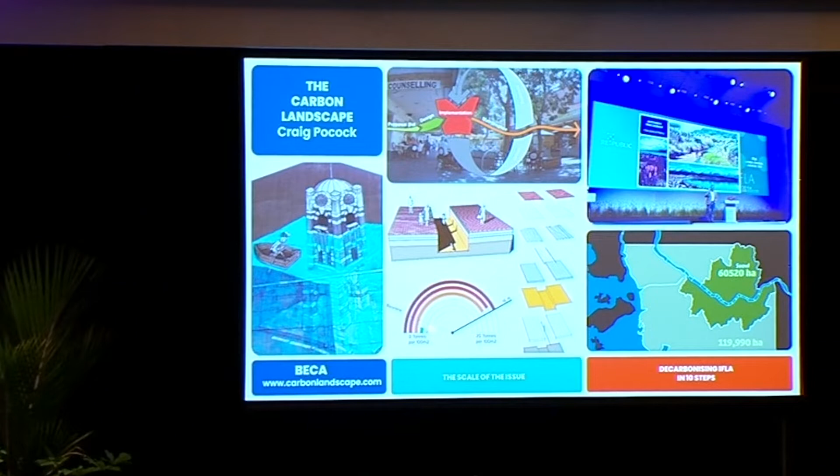All right, let's get into it. The carbon landscape really comes from a comment I made on a stage not dissimilar to this in 2006, during an award ceremony, where I mentioned there was possibly a carbon impact to what we do and we should consider it. I didn't think it was a particularly interesting statement, but by the end of the week we had a whole series of letters sent to the NZILA. The general gist was that as landscape architects there can't possibly be a carbon impact to what we do, and even if there was, all the trees, planting, wetlands and good stuff we do would surely offset it. I thought, all right, well that's a good question.

I can understand why it was such a challenging idea, because we're cool. Landscape architects are by far the coolest of all the designers. We're busy making great places, looking after our communities, acknowledging our tangata whenua, bringing them into our design processes. We are enhancing and protecting landscapes. We are the coolest kids on the block, certainly compared to architects and civil engineers. So the idea that someone flies back into the country and says, well actually that's cool, and I fully agree, and it doesn't nullify any of those cool things we do, but there's actually a carbon layer in there that we should really think about and consider. Maybe we should consider it.

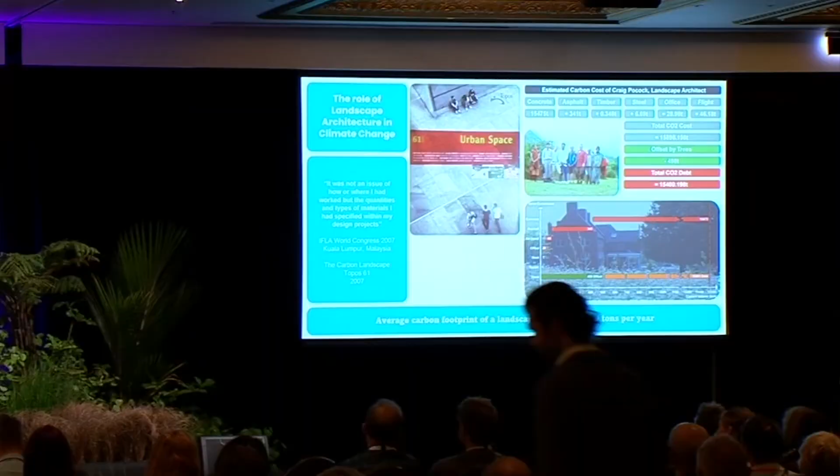I've learned over the years that if you're going to tackle a difficult situation, you normally use yourself as the example. So I sat down with a Lincoln student and spent about a week going through all my projects, doing a very rough carbon calculation of what my carbon footprint might be. We wrote that down—that was pretty straightforward, I'm old enough to have a whole lot of old paper plans, so we measured stuff up. Then we took off the sequestering value, the carbon-consuming value of all those trees, and ended up with a number.

Now, honestly, when we first started, I thought it would be maybe a little bit, maybe neutral. But it turned out that I had a carbon footprint of 1,100 tonnes of carbon for every year of my career. So I'm looking at you guys thinking every one of you is probably not dissimilar. And as I often say, I had a pretty average career, so I hadn't done anything particularly large or big urban stuff. So I thought that was really interesting. It was unexpected for me.

I didn't realise it was actually that big of an issue, so I went to Kuala Lumpur. We got a bit of money together, shot off to Kuala Lumpur, and presented a little session paper at the IFLA World Congress. So I presented the paper, dead silence. The most uncomfortable 20 minutes of my professional career. The only person that asked a question in the audience was Neil Challenger, which if you know Neil, that makes sense. Then that was it, and I remember getting off the stage feeling pretty disappointed. I felt that I'd flown halfway around the world with an idea that was not valid.

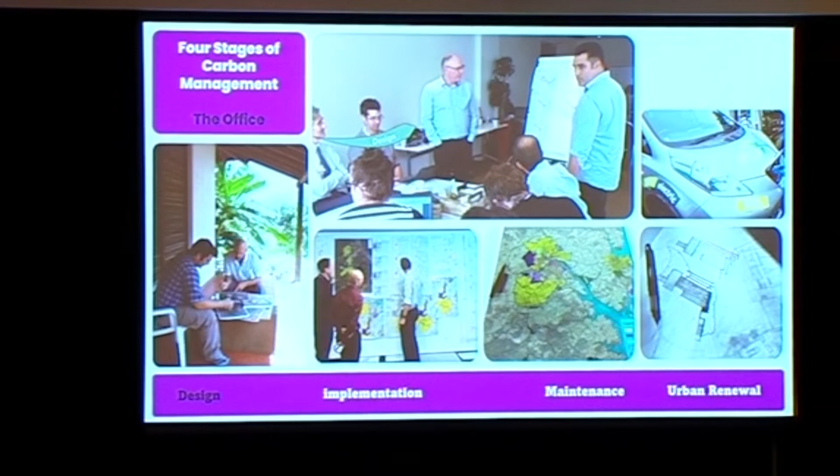So then let's talk about where carbon sits. There's no point being the dude that says, oh, you've got a problem, but doesn't offer solutions. So what I did is I broke down where carbon sits in 4 stages in what we do. I looked at the carbon impact of how we run an office. It's irrelevant. Right, great, change the light bulbs, get an EV, fine. But that's not where it sits.

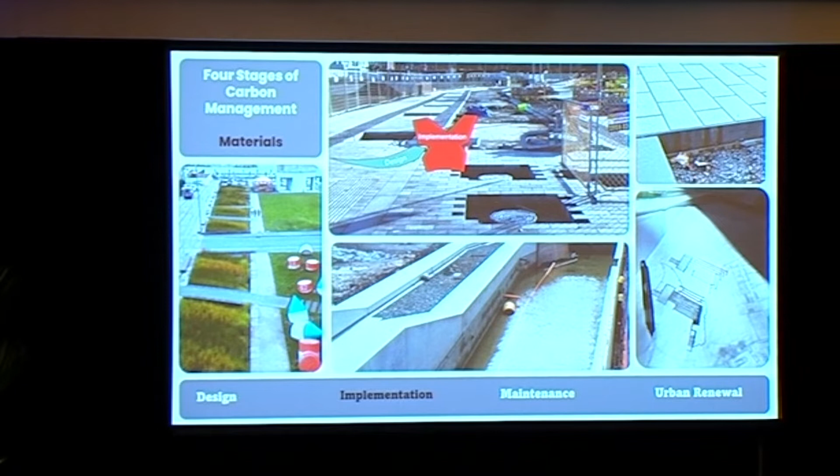Where it sits is how we build and how we specify materials, okay? That's the biggest chunk of carbon that we're responsible for, but not the only one. And I'll go through that bit in detail in a minute.

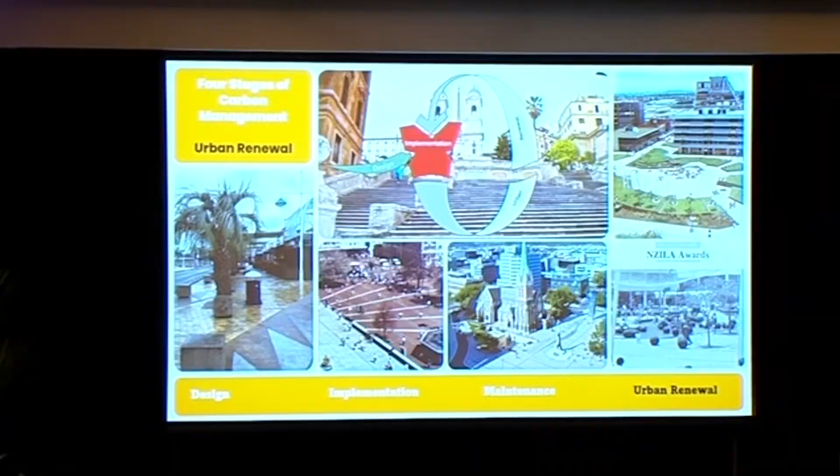If you understand that there's a significant amount of carbon in the urban spaces that we build, and that you can't design carbon neutral or zero that out, and there is a cost to it, then the absolute worst outcome for the climate and for the next generation is urban renewal, where we replace our urban spaces every 20, 30 years. Even our award-winning spaces, we've replaced in less than 2 decades in some cases. So that's the absolute worst outcome, because fundamentally, by the time we start to replace that space again, we haven't paid off the carbon debt from the first time we built it, and now you're adding more carbon into it. So what you get is compounding carbon debt or interest, and it's the absolute worst outcome.

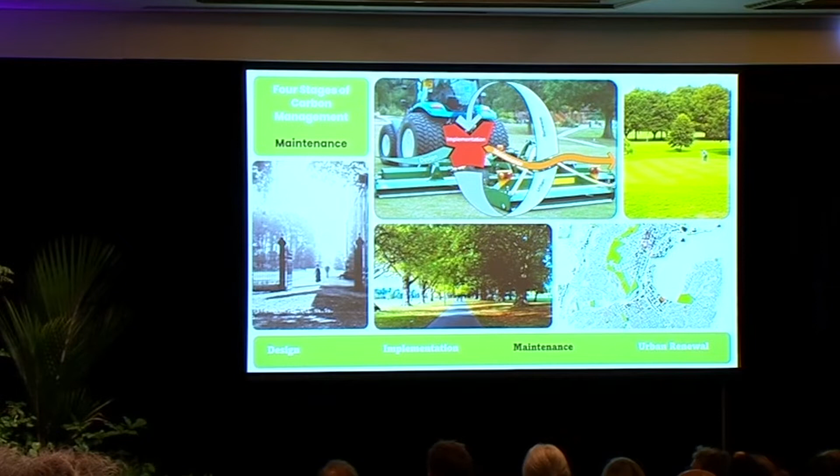Finally, the 4th area that we started looking at where the carbon sits is how we maintain our landscape, and I think this is really fascinating. This is something I've really only started looking at in the last 3 years. We manage all our landscapes with fossil fuels, one way or another. And I'm not just talking about how we mow lawns. Pretty much every aspect of how we manage entire landscape systems and networks across systems is all fossil fuel built. And the per square metre cost of it is nowhere near as big as the implementation cost of building landscape. But it is the carbon debt that just keeps giving and giving the whole life expectancy of that project. So if you can dial that down, it has a profound effect across decades.

The other thing that's really interesting about it is we have one of the highest carbon consuming maintenance or management techniques that we could have ever adopted. And what's interesting is it's a throwback from the 18th century. I started looking at why do we do things the way we do, and actually it's a throwback from colonisation and adopting a Western landscape standard, which was a show of power. So when the original colonials came through and they wanted to replicate what they left at home and to show that they had succeeded, they brought with them, unbeknownst to them I'm sure, a high carbon costing landscape.

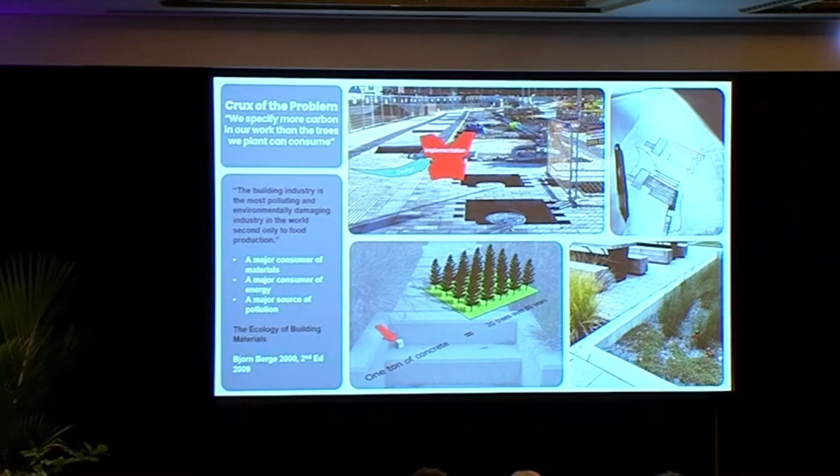So what I want to focus on with you is to talk to you about the scale of the issue. And so what we're going to focus on here is really around building and materials and how that works.

Fundamentally, the construction industry is the second most polluting industry in the whole world, secondary only to agriculture. And why that's relevant to us is that we're the ones with the pen that draws carbon on paper. Every sketch, whether on tracing paper or in AutoCAD, has a carbon value to every decision you make. So how do we understand that?

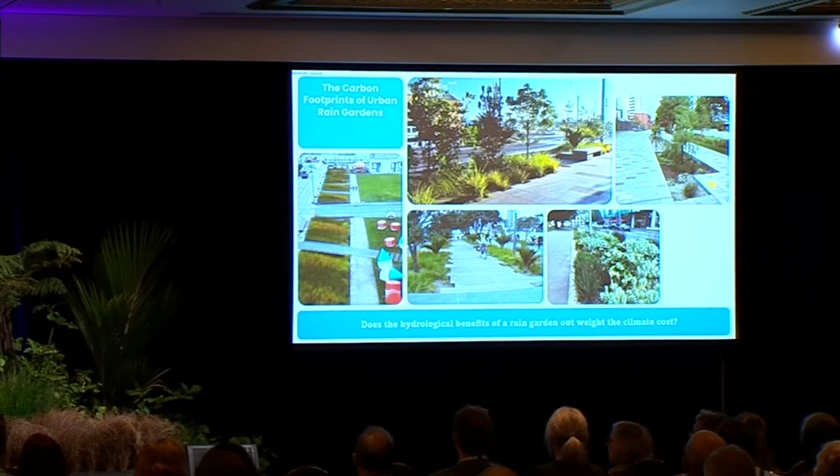About 2 years ago, I started picking up different subjects to look into, and I became interested in green infrastructure. I wanted to understand the carbon footprint of rain gardens, so we started doing a bit of work around calculating that out.

The difficulty with rain gardens is that when you look at them, they're cool, they're green. You can see community values, ecological values, and aesthetics. They're a beautiful piece of infrastructure that does a lot of work. But to understand their carbon impact, you've got to look below the ground. If you're going to understand carbon at all, you can't start and stop at the top surface.

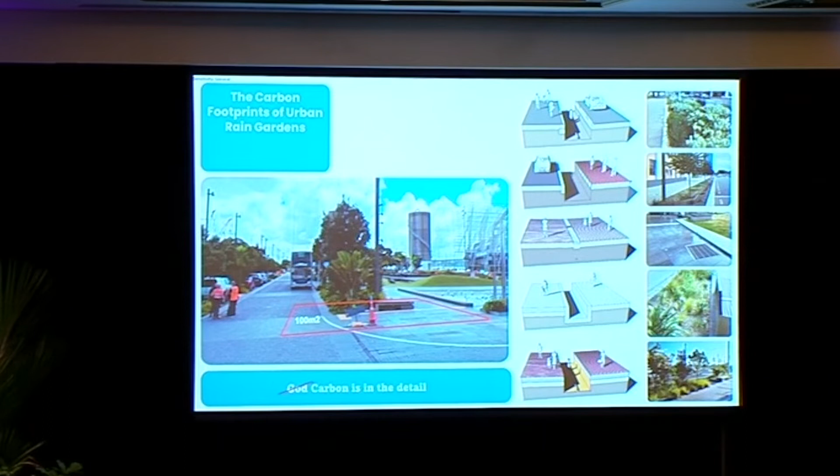The way we went about it: we found 6 rain gardens throughout all of New Zealand, and we decided to pick a 100 square metre area, a 10 by 10 area, not too different from the size of this stage. We wanted to work out the carbon footprint of 100 square metres so we could extrapolate it out.

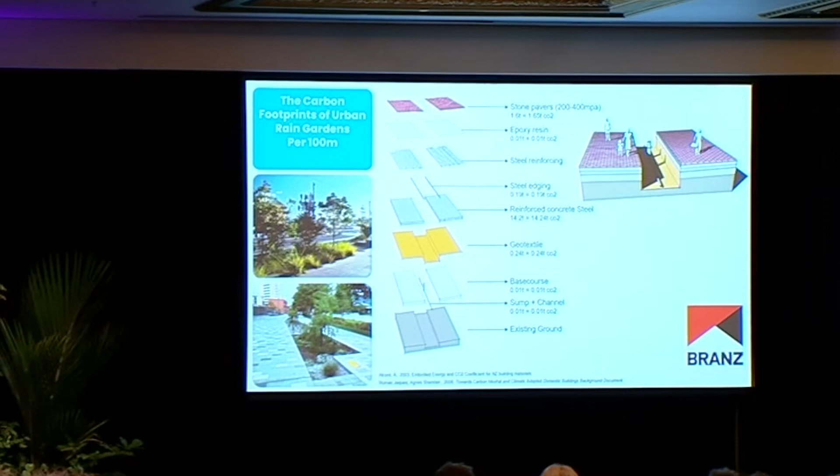The way you do it is we created a model of that 100 square metres. We then exploded each layer out, and added a carbon number to each one. These numbers are LCA, life cycle assessment numbers, provided by BRANZ that are New Zealand verified and equated out in an international standard. None of this is mine — this is just me applying it to one thing, but these are all verifiable numbers. So that's how we went about doing it.

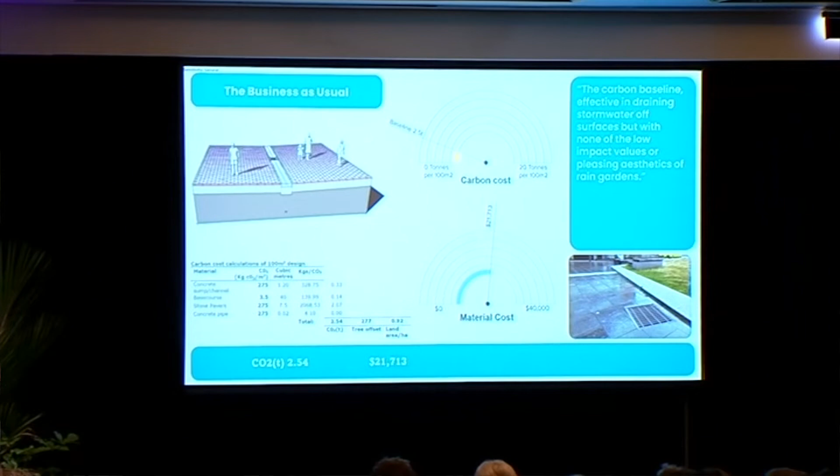So now, to demonstrate the sense of scale of carbon mitigation, we had to start somewhere, so we started with a baseline. Since I'm almost 3 decades into this career, this is how we used to build things in the 90s: good old AP40, some unit pavers, concrete channel, a slab — way before any rain garden ideas. We did this as a baseline, with all the components calculated out. So 100 square metres of business as usual comes to 2.5 tonnes of carbon.

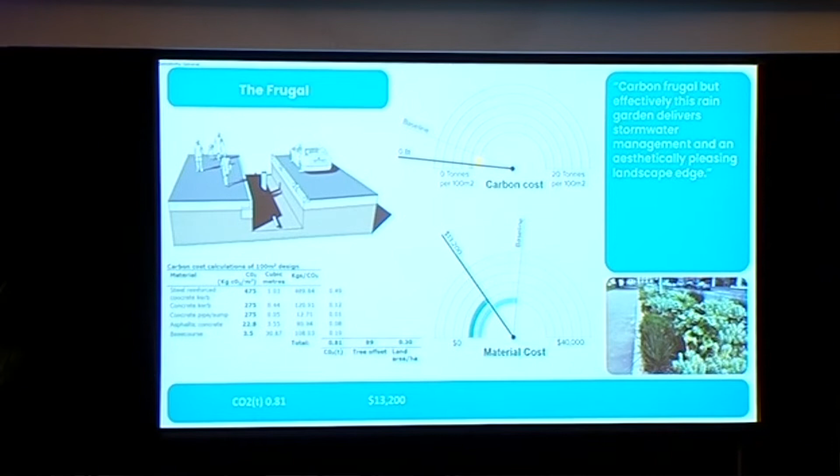This rain garden is in Christchurch. It's got really good functional asphalt surface on either side, nice concrete edging, and really nice planting that helps offset the cheaper materials. It came in at a carbon cost of 0.8 — significantly below the baseline — which means you can build green infrastructure for less than the 1990s approach to civil engineering, which is good. Hold on to that idea.

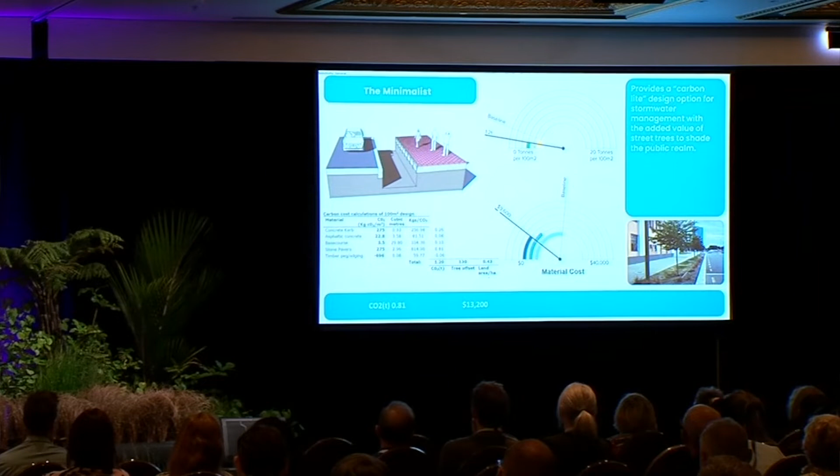The next step up, I like to call the minimalist. We've moved away from the frugal to the minimalist, meaning we put a bit more money into the paving. It's got a timber edge — again, this one's in Christchurch. It had a baseline of 1.2 tonnes per 100 square metres.

There's another 3 that I've skipped over here, so I'm going straight to the last one: what I like to call the carbon deluxe. The carbon deluxe is like a good burger — made up of 80mm cut stone epoxy resin onto about half a metre of concrete reinforced with steel. It has steel edging with an entire secondary drainage system built into the garden, lined with a nice geotextile and a bunch of material — looking at 16.4 tonnes of carbon per 100 square metres.

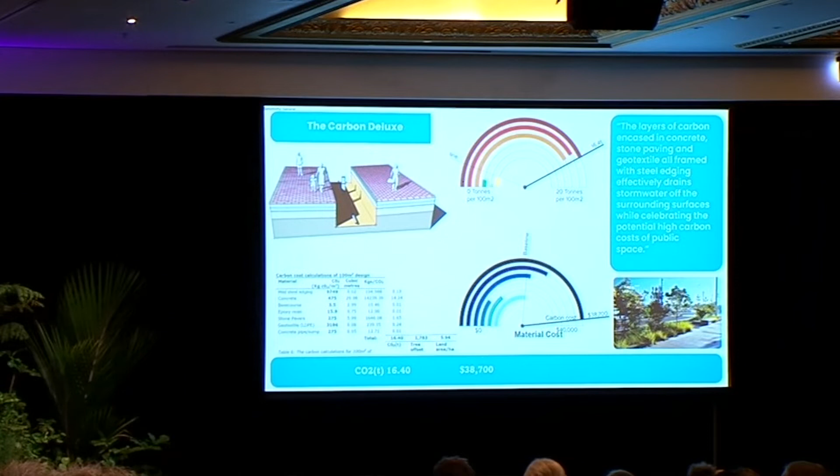I was presenting this at a water conference because I like picking fights, so I didn't worry about you guys — I went straight to the civil engineers. The thing with engineers is they get the numbers, but they can't necessarily see the outcomes. So I thought I'd demonstrate it in a different way for them: we grabbed an area that most people would recognize, and we drew that little red square.

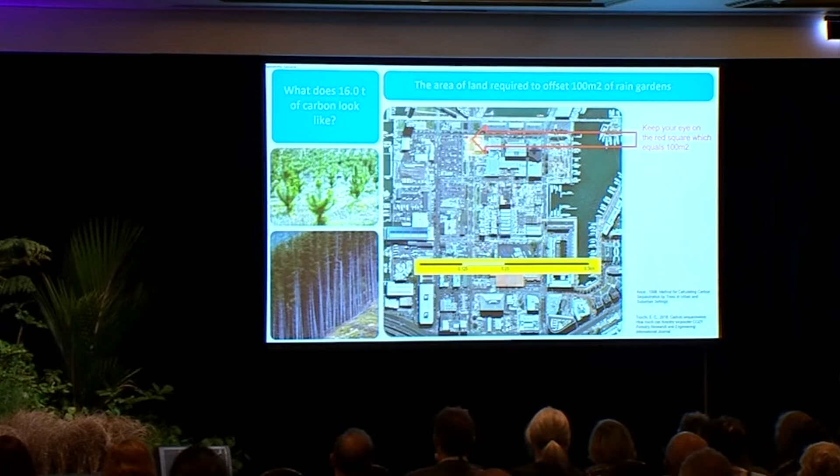This is drawn to scale. The little red square is 100 square metres to scale at the Wynyard Quarter. The yellow square represents the planting offset that you would have to plant to offset the red square.

Now, thinking back to that old comment about whatever we plant offsets what we do, right? To make this work, we use forestry standard density planting, 300 trees a hectare, the same way you'd do a pine plantation. Think about your parks and your 5 trees. We didn't do that. We did a very high density planting.

So what does it look like? Here's the frugal option: cheap, happy and highly effective, 89 trees to offset 100 square metres.

You've got the minimalist, looking at 130 trees and about half a hectare of land to offset 100 square metres. Then you get the business as usual.

Now we're saying to jump up a little bit, right? So 277 trees and almost a hectare of land to offset 100 square metres.

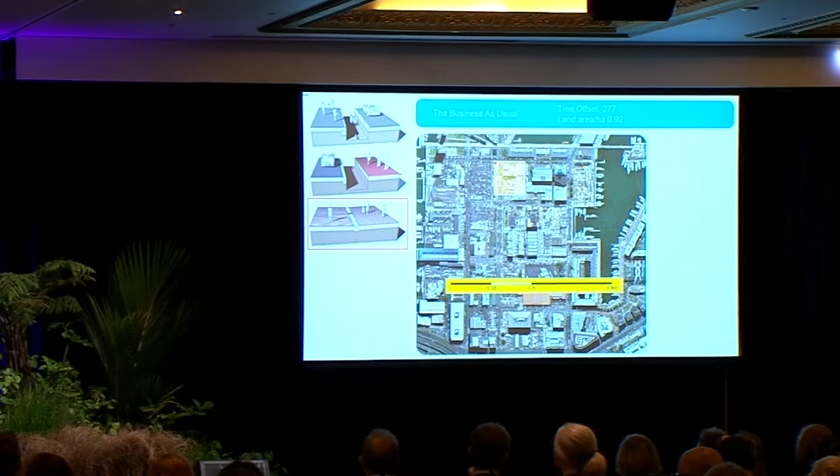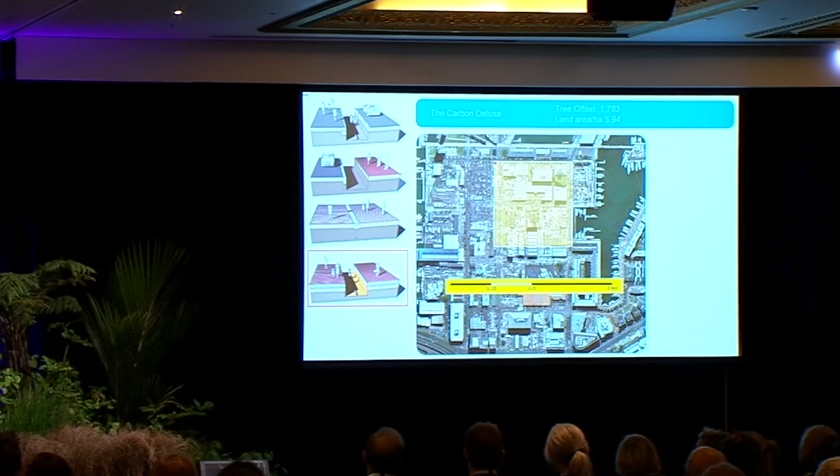Then the carbon deluxe: 1,783 trees and almost 6 hectares of land to offset 100 square metres.

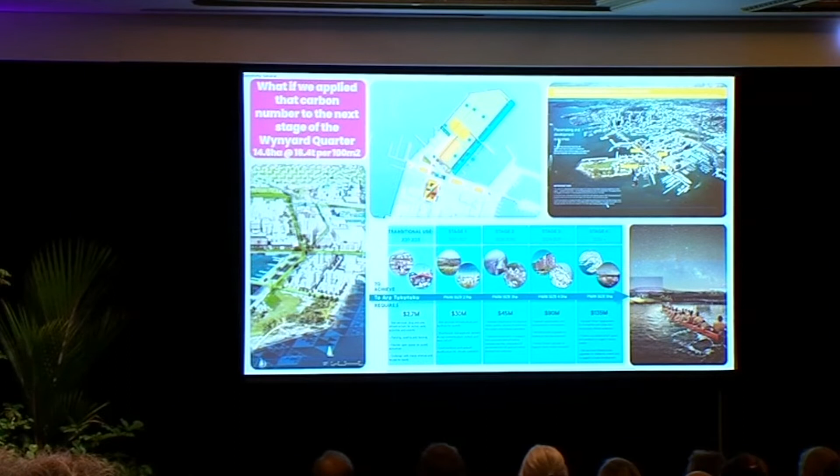So I thought about that and looked at the second stage of the Wynyard Quarter, and it looks like this incredible project, which it is - an incredible team and an amazing process that we've just seen rolled out over the last 3 years.

I know that they wouldn't do what they did - those numbers from the Wynyard Quarter are 10, 12 years old, so I'm assuming there wouldn't be that approach to detailing again. But if we applied that 16.4 tonnes per 100 square metres to stage 2, what does that look like?

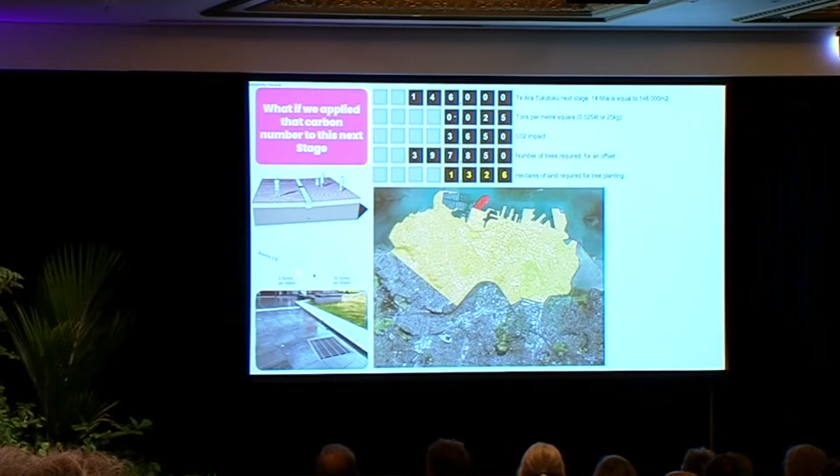Well, depending on which detail you take - hang on, we haven't got to the punchline yet - if you do the business as usual, which is the 1960s approach, which again you guys would never do, you're looking at about...

400,000 trees, which is about the size of downtown Auckland if you were to plant it out. If you take the details from stage 1 Wynyard and apply it, you're looking at about 2.6 million trees to offset stage 2. And the point is that you're not going to offset.

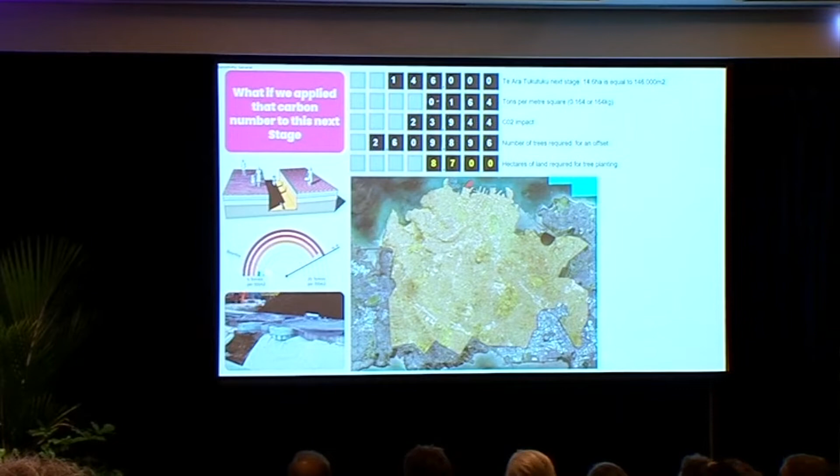You can't offset. The challenge is to reduce as much as you can, not offset. You can't do it, it's impossible. It frustrates me when people talk about offsetting. It's not possible. You need about 8,700 hectares of land.

And this is not about the Wynyard Quarter. The truth is somewhere in between. You'll use a range of details, you'll do it in the most carbon sensitive way possible to get the best outcome. So neither of those two will be the reality of the final outcome.

I think what's really exciting about the Wynyard Quarter is it's $350 million. If that value of funding is directed towards low carbon approaches, you could create a whole market of low carbon products that currently aren't supported by a whole lot of very small projects.

You'll hear me talk about it soon - one of the most powerful things we have for change is our free market value. And that's a hell of a lot of free market value that you could apply to move us forward as a collective, a decade ahead of anyone else.

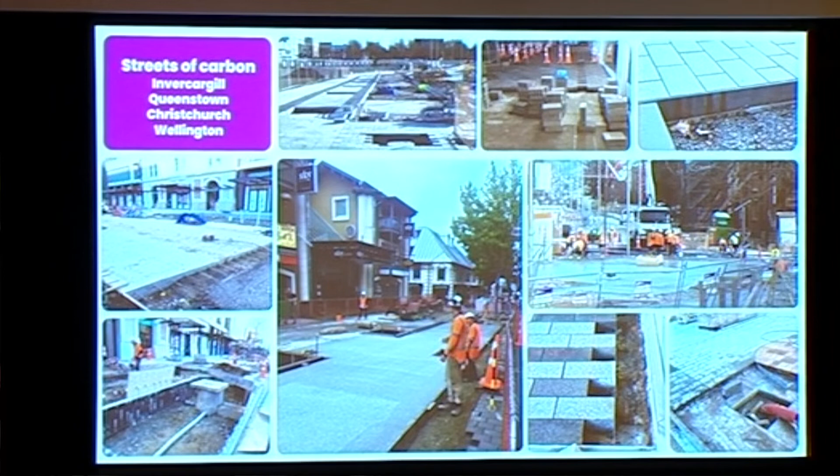It's not about the Wynyard Quarter. I see the same design details - slabs of concrete, reinforced steel edges, duplication of stormwater systems - being rolled out right across the country. This is not about the Wynyard Quarter or that team. I'm just trying to show you the scale of the issue.

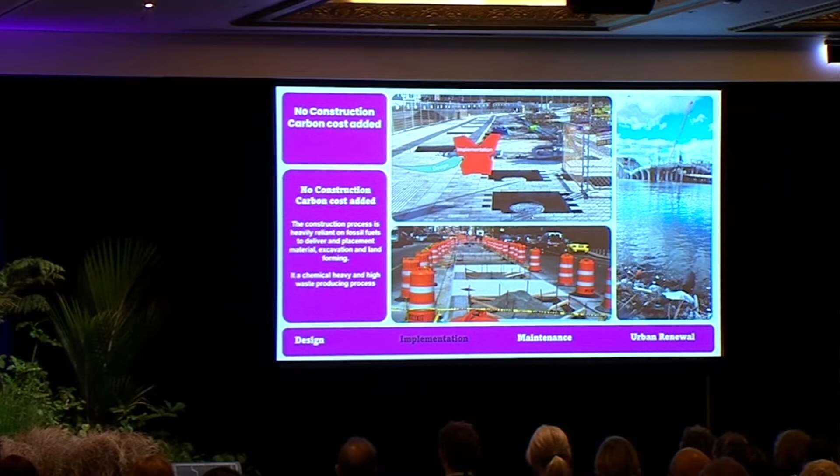Those numbers that I've shown you are conservatively low. What I haven't done, and maybe one of my next jobs, is to look at the carbon cost of how we actually implement. All I've shown you is the cost of the surface. We haven't talked about the actual construction process of how you get there, and we haven't talked about how fat our carbon furniture has got.

We're now starting to talk about 2-ton benches. I had a contractor laughing at me the other day, saying he didn't know why I was doing bolting details - once these sit on paving, they can never be moved, even if you wanted to.

The point is, in 2022, we need to start thinking about carbon as a baseline so we can make informed design decisions to move forward. The numbers sit there, brands have the numbers, the calculations aren't that hard.

All right, so 7 minutes. I'm going to push and talk to you about what I think the 10 steps to decarbonise our industry are. These are 10 steps I've been thinking about for 18 years, because for 18 years I feel like I haven't made a lot of traction, either with you guys or internationally. So I've been really thinking about how do I get the design industry to change its ways.

So the first thing, and this may be recognisable for some of you, you've got to acknowledge you've got a problem. There's a few other organisations that ask you to do that as well, but fundamentally we have an addiction issue with carbon. And not only have we an addiction, the carbon collective footprint we have since 1990 has gone up threefold, if not fivefold. So we're going the wrong direction, fundamentally going the wrong direction. We have to acknowledge there's an issue, and when you acknowledge there's an issue, then there's action. But if no one ever acknowledges there's an issue, then fundamentally there's not a lot of action.

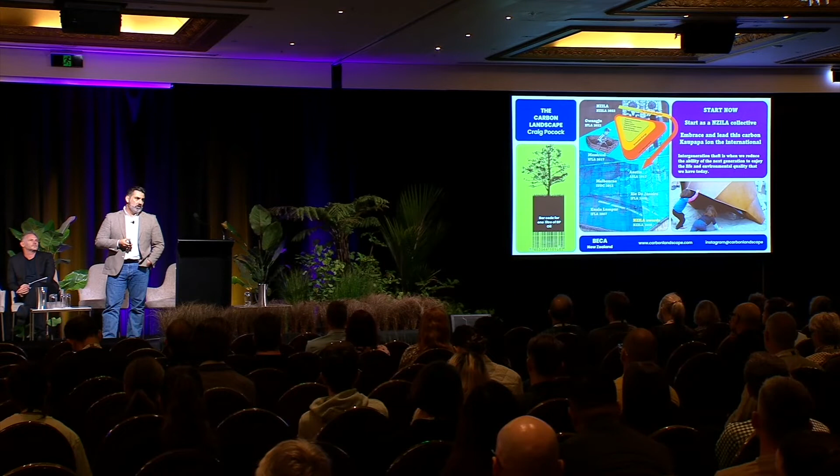What I'd say about this thinking is it's still further ahead than what I saw in Gwangju 4 weeks ago. Talking to the Americans and the Australians and the Scandinavians and the Africans and all the different leadership, the concepts we're talking about here is still further ahead than where they're currently at in the way of understanding how you tone everything down. So I think there's a really great opportunity.

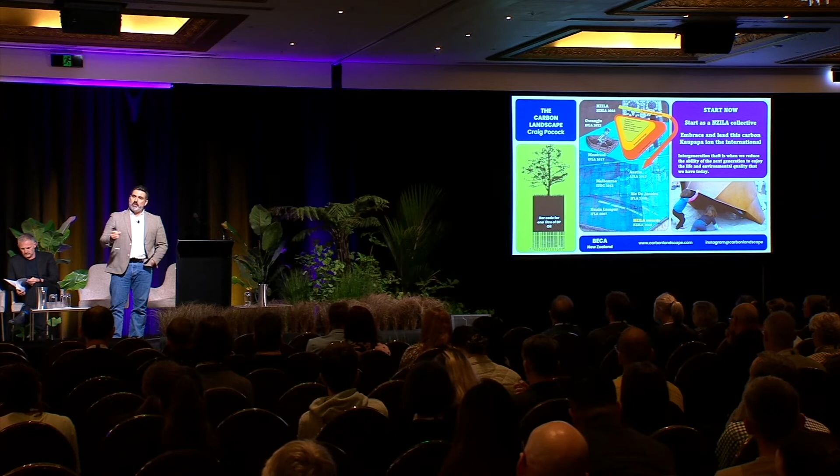I'll leave with the idea that we've got to start thinking intergenerationally, because to not think intergenerationally is intergenerational theft. It's not our generation that's going to pay for the decisions that line on the paper - it's the next. So we've got to reframe the way we look at landscape architecture. All right, thank you.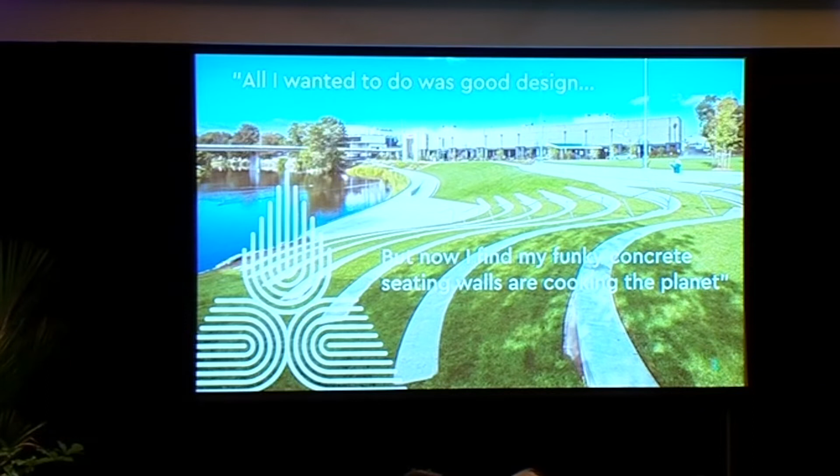I'd also like to pay my respects to the traditional owners from where I currently reside, the Cadigal people of the Eora Nation. I pay my respects to the elders past, present and emerging, and extend that respect to any Aboriginal and Torres Strait Islander people in the audience today.

I have the privilege of coming from a land that's home to the oldest continuous culture on Earth. That culture dates back at least 65,000 years, potentially longer if you consider the land bridges from the last two ice ages. You will perhaps better know my home as Sydney. I live in Lilyfield, located only 8 kilometres from the site of the first encounters 234 years ago between the European colonists and the Cadigal people. I acknowledge their continued caring for country, seas and skies, and note that sovereignty was never ceded.

It's wonderful to be back here in Aotearoa. I've heard some great presentations in the last 2 days, and the waterfront tour was pretty amazing. There's some really great work being done by NZ landscape architects.

I guess we all want to do great design and planning work, but we also need to be addressing climate change. Sir David Attenborough has described it as the defining issue of our time. The IPCC's sixth assessment report, which came out last year, paints a damning picture. It makes it unequivocally clear that every tonne of CO2 is overheating the planet.

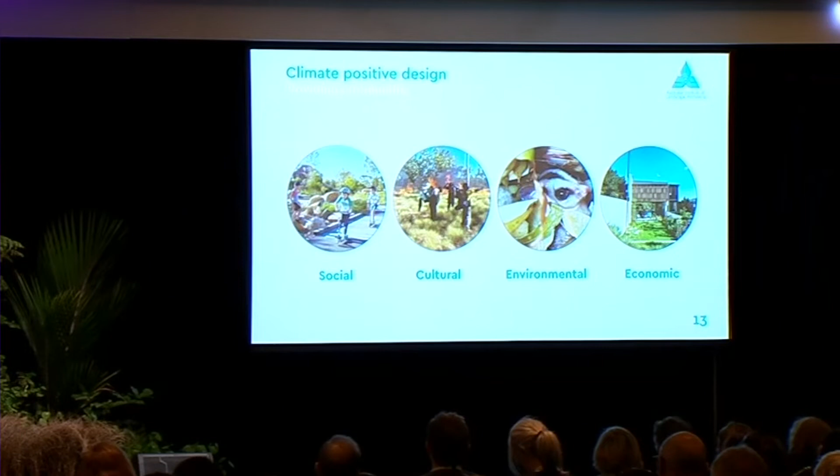So the action plan we've just released last Wednesday is framed around 3 big ideas. The first one is to understand your climate impacts. The second one is to manage and mitigate those climate impacts. And the third one is then to start the conversation, to collaborate, to communicate, and to advocate.

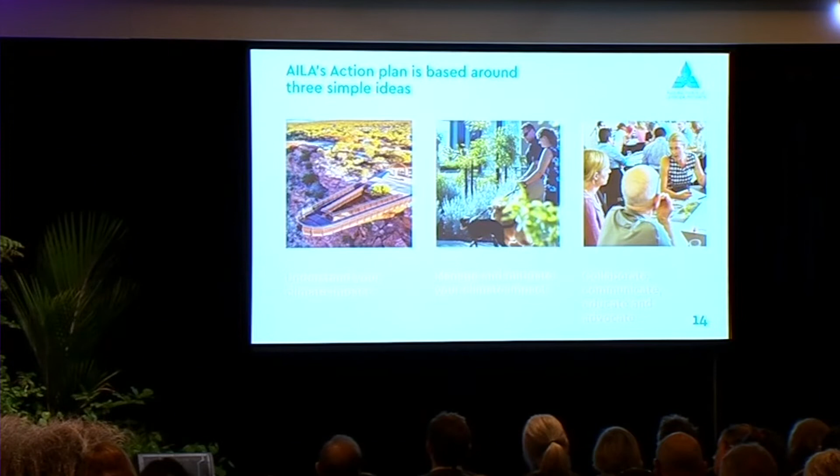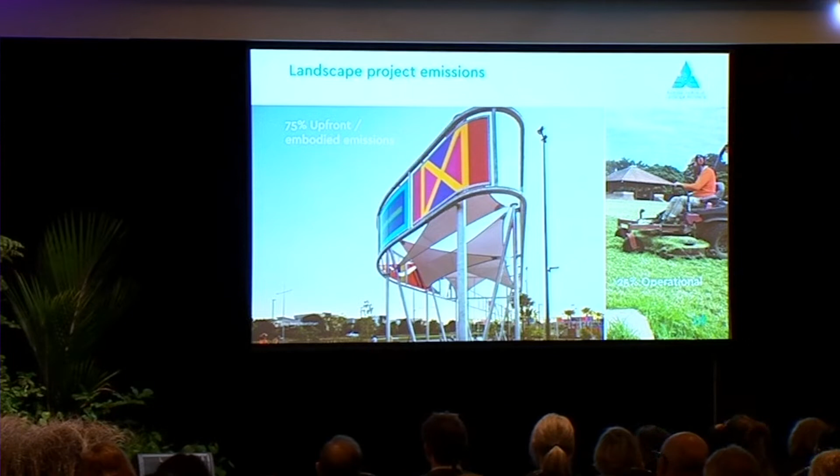So first of all, how do we actually understand our carbon impacts? The first thing to understand is that the bulk of our emissions really are embedded the day the project's open and the big party's held, and it's fantastic. But about 75% of our emissions, based on the data we've looked at, is embedded upfront. The other 25% is those operational emissions that go on beyond that, embedded in all sorts of materials and how we construct and so forth.

So we really need to fully consider the whole life cycle of our emissions, where they go, cradle to grave, and how the whole thing works together. So from the very beginning of vegetation removal, we lose the carbon in those trees plus the foregone sequestration of those trees. Obviously in all the cement and concrete products too.

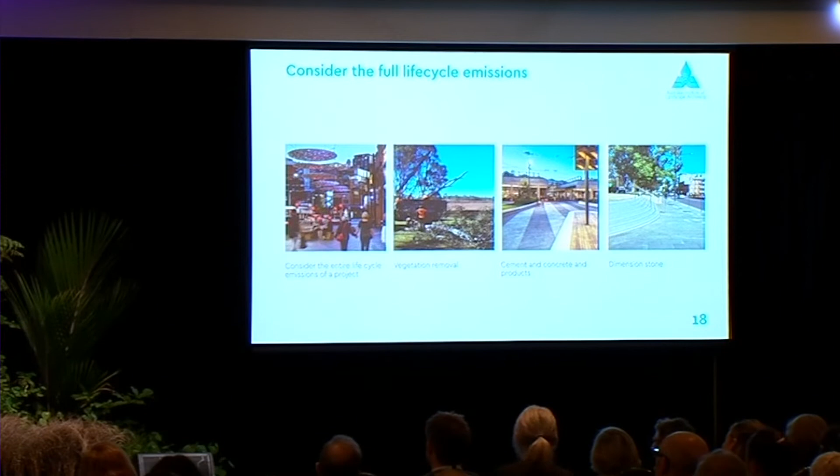Dimension stone you'd think is carbon neutral, but in fact the amount of energy required to cut and transport it in a fossil fuel environment is substantial. Obviously steel, galvanising, aluminium, all of those products are very carbon intensive. That is shifting. You'd be surprised how much carbon is in a piece of furniture. Kiln dried timber is way up there in terms of carbon.

And then we've got our operational emissions, so that's things like your mowing, your leaf blowing, fertilising, and so forth. Using a leaf blower for an hour is about the same as driving from the top of the North Island to the bottom of the South Island in terms of pollution. And then there's the thing that Craig's talked about, this idea of longevity, and potentially that also comes into laziness in terms of not actually thinking and re-updating stuff. We do tend to shift things, replace them sooner than we probably should.

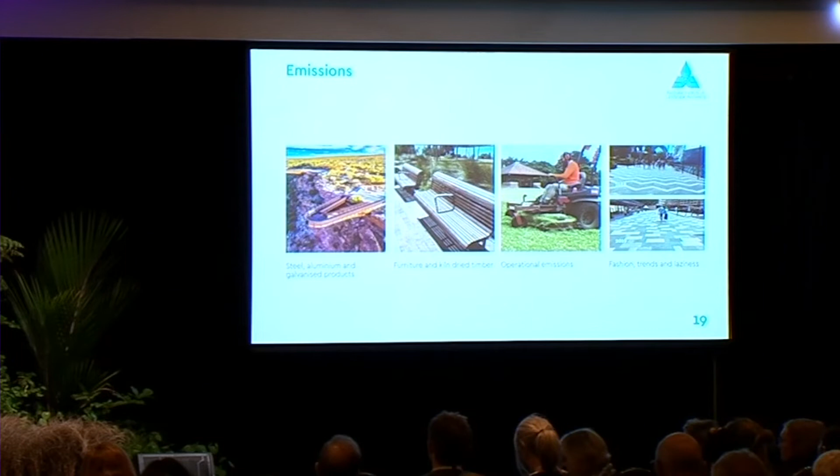So in terms of measuring your project's greenhouse gas footprint, the Australian Institute of Landscape Architects has been promoting the Climate Positive Pathfinder, which is a tool developed by Pamela Conrad in California. While not perfect, it's a really great start. It's free, it's online, you can make your own account. In fact, we suggest people make two, so they can have an account to make components and the other one that gets logged. You can actually tick not built projects so it doesn't contaminate the data. She gets worldwide data that we see as well.

But like all cost accounting, like all cost planning, you should measure everything. It's like when you get your credit card bill at the end of the month, you go, how's it $4,000 when there's only lots of $10 purchases? It just adds up. So put in stuff, work it out. If you have to guess, even guess, just so you've got a better account.

And then you need to be a bit careful about planting. The way that Pathfinder calculates shrub planting in particular is that it assumes the plants are maintained for 50 years, and that's not necessarily the case. They might not get maintained at all, or even with a domestic house, it might get changed by the next owner. Lastly, you can use that as a common benchmark, like a metre squared per emissions per metre squared, so you can compare different projects from different parts of your organisation to a benchmark and start to set targets.

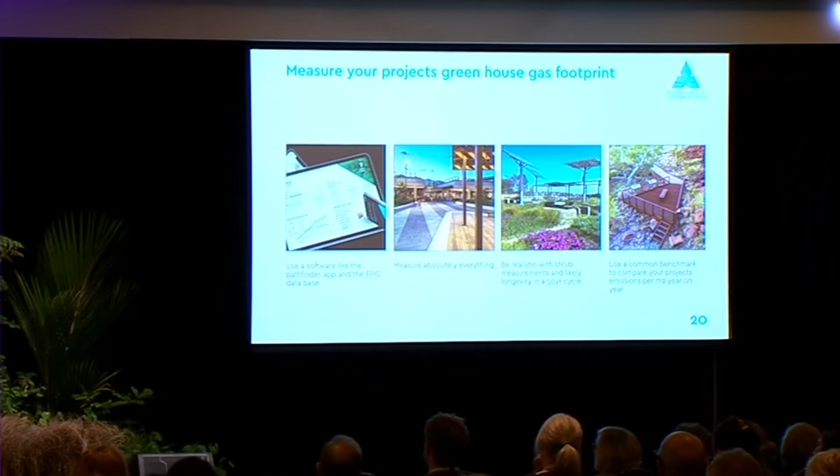So the second big thing is how to manage and mitigate that climate impact. Broadly, climate is talked about in two big ideas. One is mitigation, stopping greenhouse gases that are cooking the planet from getting into the atmosphere in the first place. The second is pulling down CO2, the only gas we can actually remove from the atmosphere. So that's the mitigation side.

That's where you've got to think about materials, I'll come to that in a minute. And then the other one is the adaptation side, the things Emily was talking about earlier, the flooding, increased intensity of rainfall, extended droughts, and so forth.

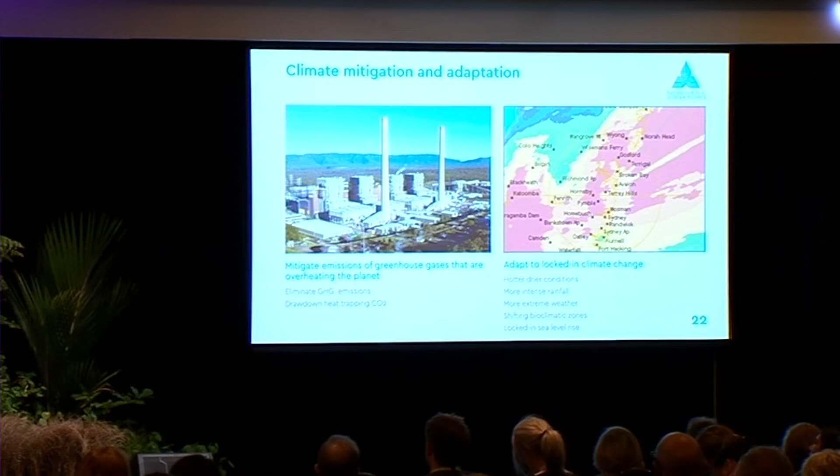The first thing we could do is make good strategic decisions. If we can embed climate positive design at the very top level of how we think about things, how we write briefs, how we design projects, and use that for driving policy change - if we can change policy, we don't have to rely on the goodwill of developers or clients to do things, they're just required to. So driving policy could make a huge difference.

We can make good decisions like compact cities, making it easy to get around on a bike, easier to get public transport, reducing energy use elsewhere and reducing fossil fuels. Simple decisions too - in Australia there's still a lot of fossil gas, we just have to say this residential estate is going to have no fossil gas, no tanks, everything's going to be electrified.

Then we have to start thinking about drawing down CO2. Part of that is, in Australia, cultural burning, which while it emits CO2, also makes a more resilient landscape that is less prone to catastrophic failure. For most of us, the bulk of the carbon we store in our projects will be in the woody material in our trees, some in the soil, and also in carbon-rich coastal landscapes.

If we start to design better, that's also an important component. That's looking at providing as many trees as possible to maximise the soil plate, maximise water, get those trees to get as big as they possibly can, use less concrete, maximise green space, soft spaces and so forth.

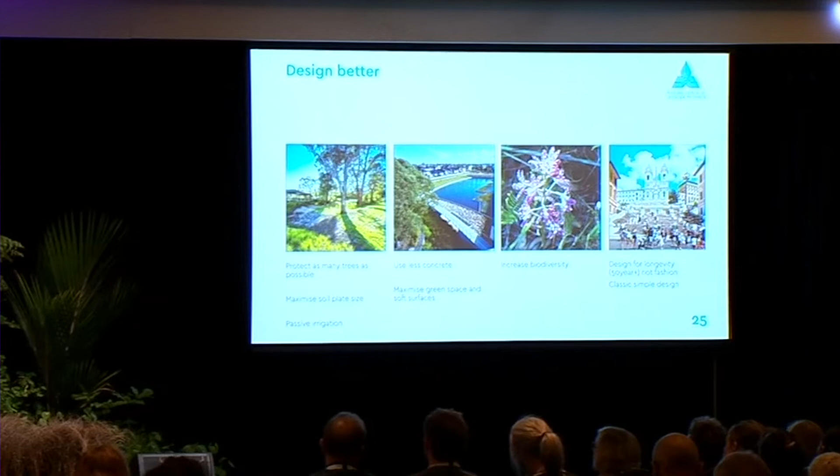Biodiversity is a critical element to that, and biodiverse landscapes sequester more CO2 than normal monocultures. Also designing for longevity - we need to maximise photosynthetic cover, so CO2 gets pulled out of the atmosphere through the little leaf stomata on the trees and grasses. So you've got to have the most leaves possible, the biggest branches possible, the biggest surface area of green possible, and find ways to make sure your trees grow through good soil and good water.

And then at a bigger scale, at a farming scale, how do we shift to regenerative farming practice where, for example in Australia, 351 million hectares is covered by agricultural land, half of Australia's landmass. More resilient, high carbon soils are more resilient to rainfall, they absorb more water, and it's an approach where you're designing for the soil, not the stock of the crop.

So as a landscape architect, it's the same thing - we want to make sure the foundation is really, really strong. The sort of thing you could do tomorrow back in the office is start changing your specifications, looking at what you've currently got. In Australia, business as usual would be just N for normal concrete, N25. We should all be specifying S, special concrete, so it's got some admixtures - there's people here in New Zealand that clearly make that stuff. You should also probably go, okay, we want N25 concrete that's less than 220 kilograms of CO2 per cubic metre as part of the requirement.

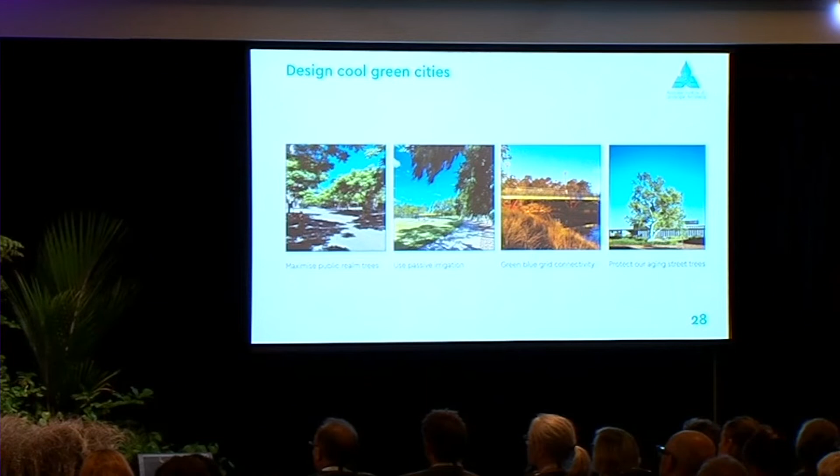How do we design water-resilient cities? There's a really interesting study done about 15 years ago in China that showed that for every dollar they spent to mitigate things with dikes and dams, it actually flooded more. So it just kept going up, the dollars kept going up, and the flooding kept going up.

And the next keynote speaker is really going to be very exciting to hear about that whole idea of sponge cities. We need to be saving gigalitres of water from stormwater, capturing that, reusing it, so we can reduce our potable water supplies. We need to be recycling gigalitres of sewerage water as well.

I mean, we have this very strange linear system where we catch water in a distant catchment, we treat it to totally drinkable standard, and we pipe it, and then we drink about 10% of it, and all the rest gets flushed down the toilet and out into the ocean. Then we've lost that resource. So we need to be heading to a circular system that retains and keeps all that water, because we are going to get drought stress and we're going to have lots of trouble.

At the end of the 2019 drought that led to those terrible fires, Sydney's Warragamba Dam had less than 730 days of water left.

We're also going to be needing to design for locked-in sea level rise. We have committed to future generations a substantial rise in sea level. At the moment, that's measured in centimetres, but it won't be that long before it starts to be measured in metres. So in the next 50 years, maybe 100 years, but certainly in the next 50 years...

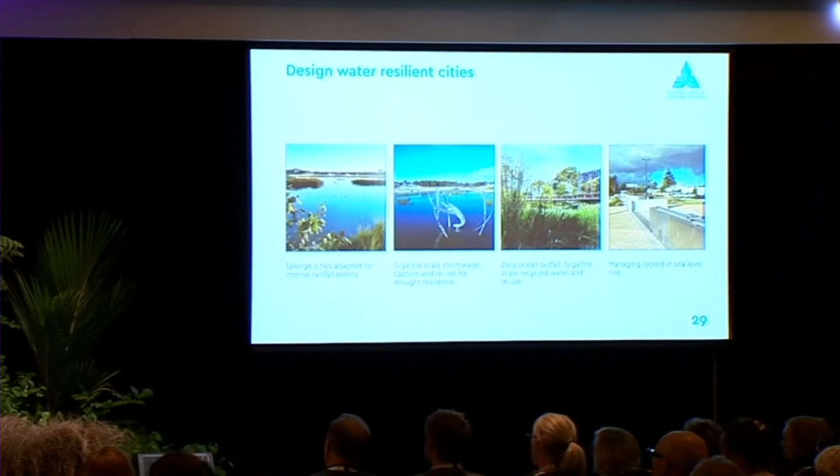So the scale idea is pretty critical as well. And how do we apply that at a whole range of scales? Most of us in the room here largely work in that top row, from the residential house estate through to commercial shopping centres and urban cores, waterfront edges to campuses and universities, and accessible cycle-friendly cities. That's where all the usual landscape architecture 101 toolkit comes in terms of our green cities, our cool green grids. But then we get to the next level, which is at the city scale.

Gary mentioned some amazing stuff being done at a big catchment scale. That's the scale we need to start thinking at. How do we connect up all those catchments? How do we actually manage all the water? How do we get those green targets, our canopy targets for public spaces?

I don't know about New Zealand, but in Australia, the Great Australian Backyard has gone. It's been shrinking for years, and now there's virtually nothing left, not even a place to plant a tree. So at a city scale, that's putting huge stress on the public realm for everything, not just recreation but water capture and tree canopy cover. We're having to get canopy cover targets in just the public realm alone, let alone the private realm.

Then the next level up is extending that blue-green grid idea out to the farmlands. This is where we've got Di driving around in her VW with the laptop in the back, doing little farm plans for people. We want to convince our farmers to convert 20% of their land to biodiverse outcomes, riparian corridors and so forth.

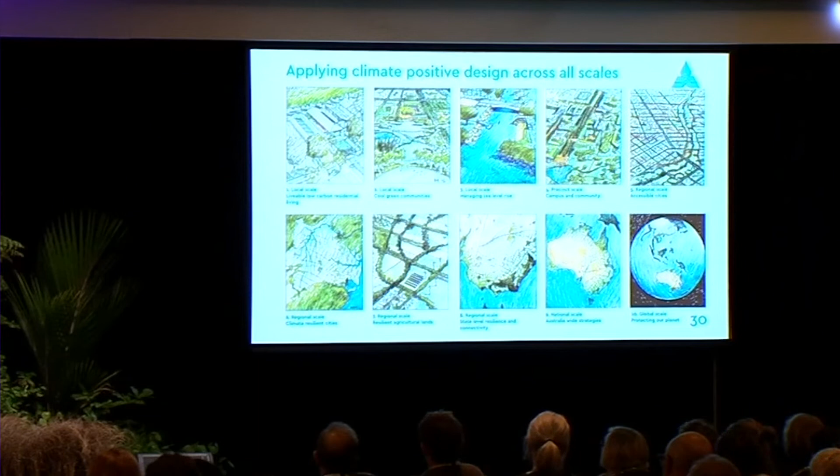So lastly, the idea of collaboration and communication. The first is obviously engaging with traditional owners. Alana made a very passionate point about how that's a challenging conversation, but it's about listening first, deep listening, engaging, recognising that Indigenous people understand their place. That's a really important ongoing discussion in Australia, and the Connection to Country conference starts this afternoon, focused largely on that idea.

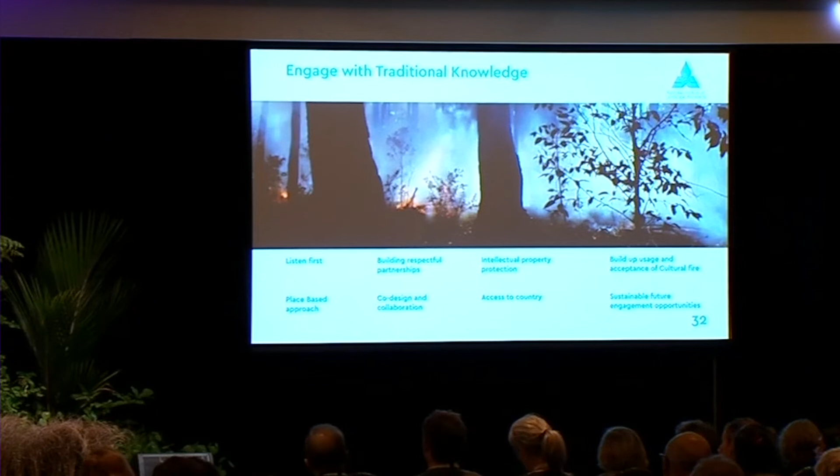How do you collaborate and communicate within your organisation? Find your climate champion, the person in the office who can run and drive with things. How do you talk to the engineer in another department to say yes, you can actually use this concrete? How do we collaborate with allied professionals like architects and planners? And lastly, Craig made it pretty clear that it's the materials we use that are driving our carbon footprint.

We need to have that discussion with our manufacturers—every time you phone them, ask can you provide me with your EPD data sheet, so they start doing that. And then lastly, how do we actually get into that policy space?

I'll touch very quickly on these three documents AILA's just produced. The first is largely what I've just been talking about—what you can do as a landscape architect. The second is about what your office can do to drive carbon neutral change and reduce your footprint. We found 75% of offices' carbon emissions come from four things.

It's electricity, transport, air transport and car hire. And lastly, we've got a manual for the Institute on how they can drive that change and what they need to do to provide education guides. These are now online—if you Google AILA Climate Positive Design, you should get that page, and navigate to the document page where there are links to download them.

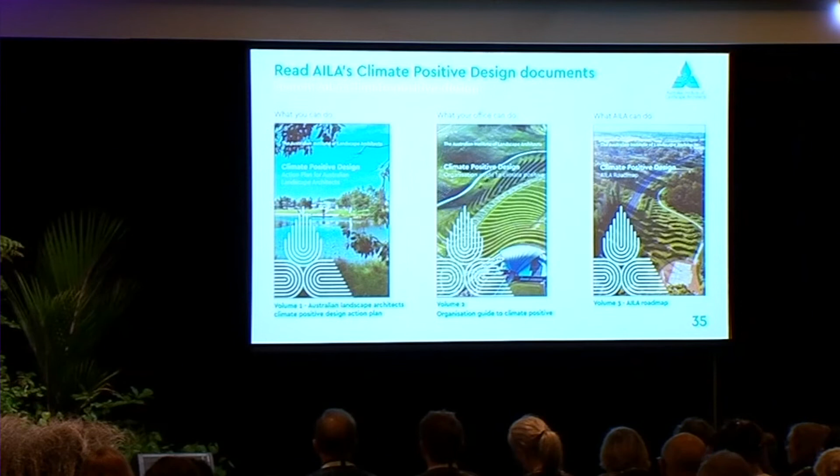We have developed a series of 9 little 3 to 4 minute, 5 minute max videos, like little sound bites to help understand where things are. The first 3 are up online now, the next 3 will be up very soon, and the final 3 before the end of the year. You can have a lunch and learn in your office, watch a 3-minute video and then talk about it. We're trying to find the best of the best resources we've been using and get them online too, so you don't have to go searching for it.

So I think, at your 50th anniversary, think about what it's going to be like at the 75th anniversary. The world really needs us, landscape architects, and I think this is our time, our time to shine. So thank you very much.

I've realised I've got a few more. Sorry, I will just quickly go through them.

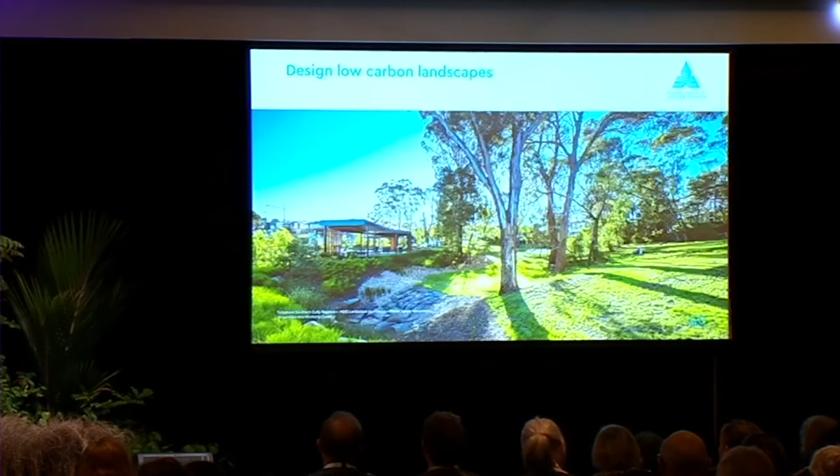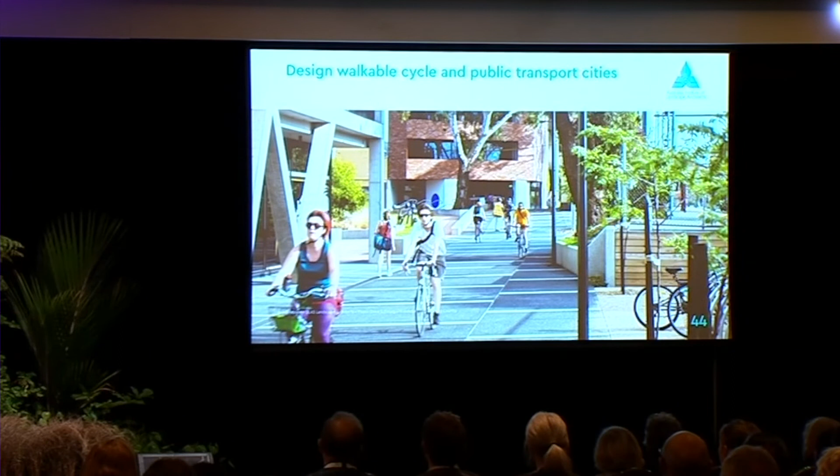So, just in summary, so you can remember: engage with traditional knowledge, design low carbon landscapes, design cool green cities, design water resilient cities, design public transport and walkable friendly cities, and then apply these at scale to Aotearoa. So, thank you.

We wanted to keep our presentations reasonably short. We knew we didn't go through complete details and everything, with the hope that you would feed some questions in. There's been a lot of information. Martin's certainly a wealth of knowledge and has been working in this area of climate really tirelessly, and has shouldered a lot of the weight of the Australian work in this space, which is part of the reason why you guys are really far ahead in that guidance back to their community.

So anyway, we would love some questions. There's some mics floating around. I'm not very good at doing this bit, but I'm just going to do it anyway. So, question time. You can pick Martin or me, whatever your question is. All right, let's just start over here. Thank you.

Kia ora. My name is Erin from Pocock, Auckland, and I was a student many years ago, Craig. What a fascinating topic, and it influenced me a lot. From a personal perspective, I've got a couple of questions. With my Chinese background, I just love talking about figures and numbers. So when we're talking about quantifying the carbon footprint of a particular project, thinking about presenting these to our future clients, I would like to know what kind of database is available in the New Zealand context. Martin mentioned there's a great tool developed by the American landscape architects called Pathfinder, and that was a great tool for us to use as a benchmark.